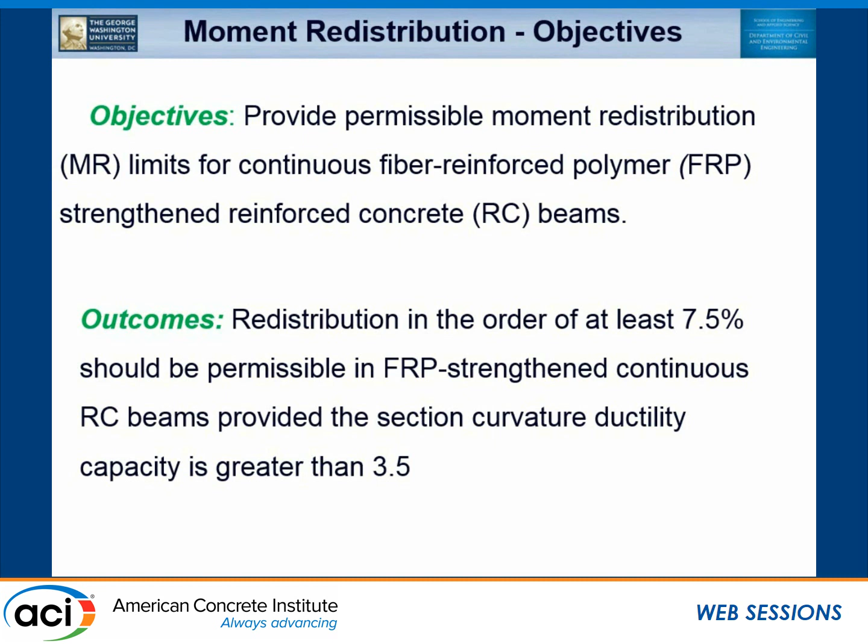Until recently, moment redistribution limits were not included or considered in retrofit applications, and the reason is because of these issues.

The behavior of FRP is somewhat brittle, but if the FRP is well anchored, the FRP rupture strain is about 1%, significantly above the yielding strain of steel. So you are going to have some redistribution. I think it's possible, and we should include redistribution, even if it's a small amount.

The other question is, was redistribution used in the original design? If the section was originally designed with moment redistribution, what is the impact on the retrofit? If we consider redistribution from a strengthened region to a non-strengthened region, we should be able to consider moment redistribution, or vice versa.

Or you have redistribution from a strengthened section into another strengthened section. So the research addressed all of these issues.

But we cannot forget that according to ACI 440, there are limitations on how much strength you can actually add to the FRP on a section. But what I want to highlight is the impact of not considering moment redistribution. There are many impacts, and I think it's important to convey that before I go on with my presentation.

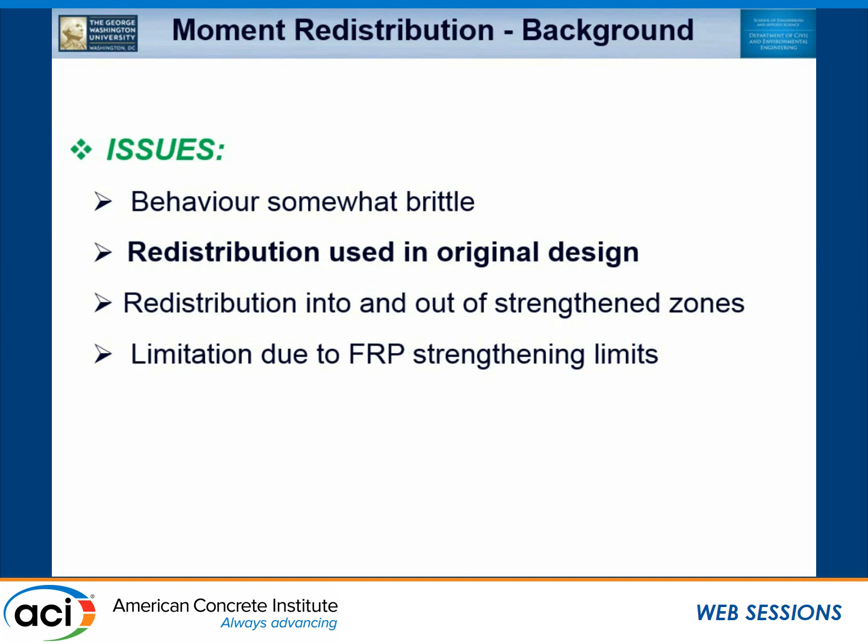Now let's imagine the code does not allow moment redistribution, and let's say we want to increase the load capacity by 10%.

Your FRP would actually have to be very high. So the question is, what if we allowed redistribution of somewhat 7.5%? Now your increase is not 36%, it's 30%, and this might be within the strengthening limits.

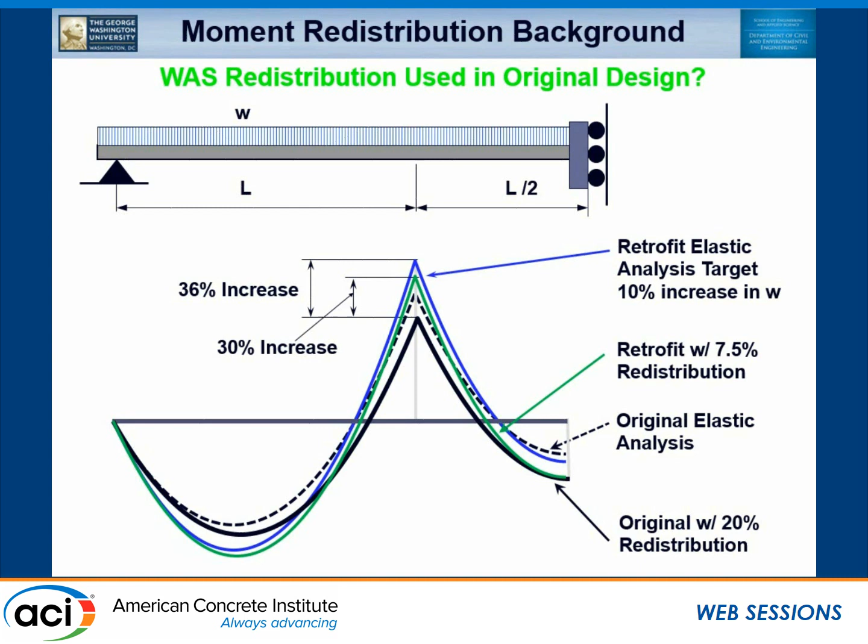So in order for us to develop reliable, permissible moment redistribution limits, very similar to what we use in ACI 318, our proposal is to do some experimental testing and advanced nonlinear finite element analysis, and see what we can propose. Here's the presentation overview.

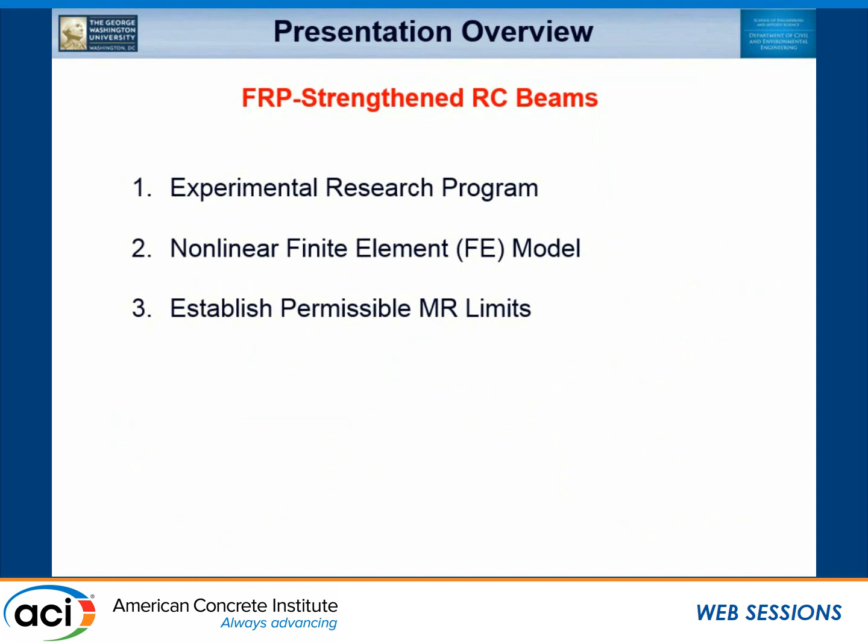I'll show the overview of the experimental research program. We tested many beams, but I'll only show 3. Then the nonlinear finite element analysis, and I'll use these results to establish permissible moment redistribution limits.

This was the experimental setup. You can see we had a 2-span beam, and we anchored the FRP with U-wraps, which was quite intense wrapping.

The reason for that is, in some of the tests, it doesn't matter if we consider moment redistribution on the section or not, the section will redistribute the moments anyway. And we had shear failure on those beams that had low U-wraps.

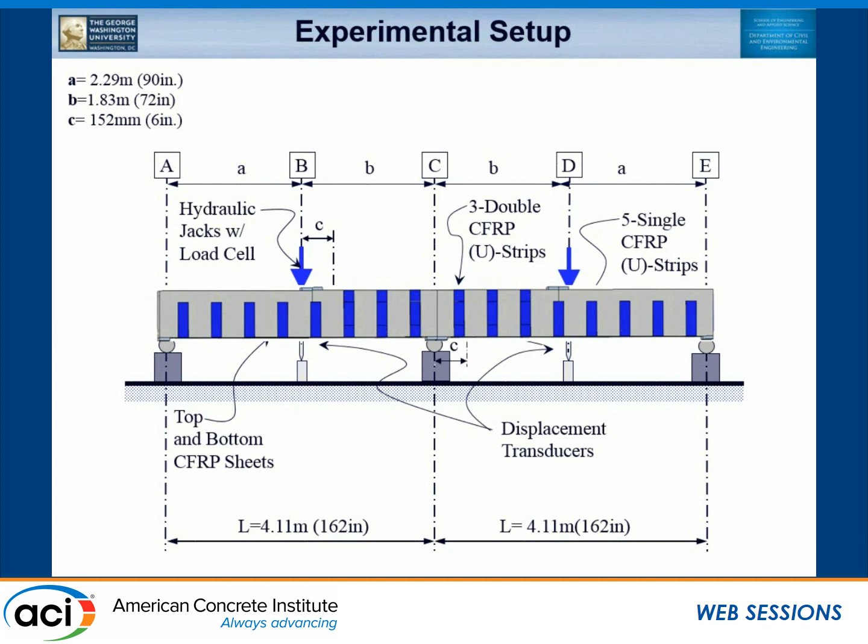Very similarly, we used a finite element model that tried to replicate our experimental setup as much as possible. I'm only going to show you 3.

One was the control unit. One used a 6-inch wide strip at the top and bottom, which I consider as low FRP.

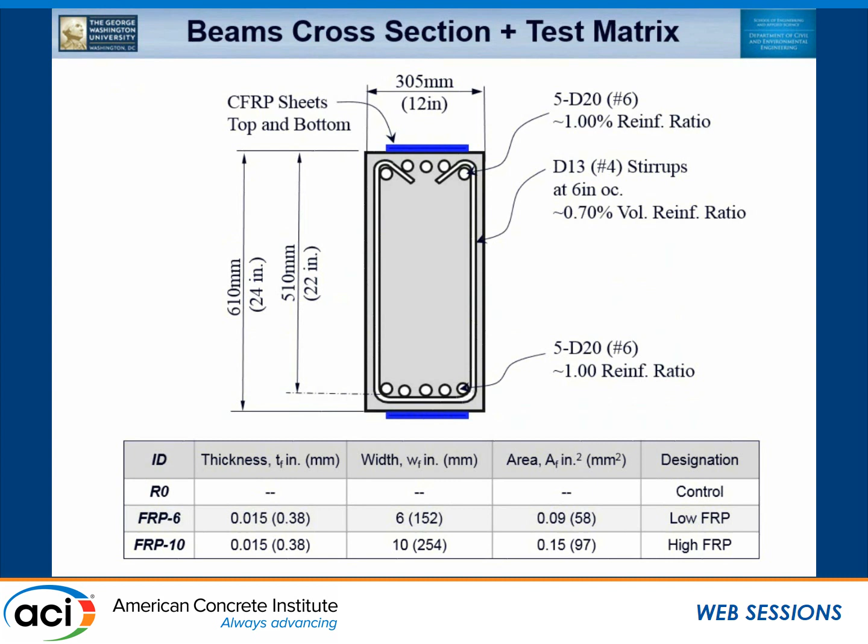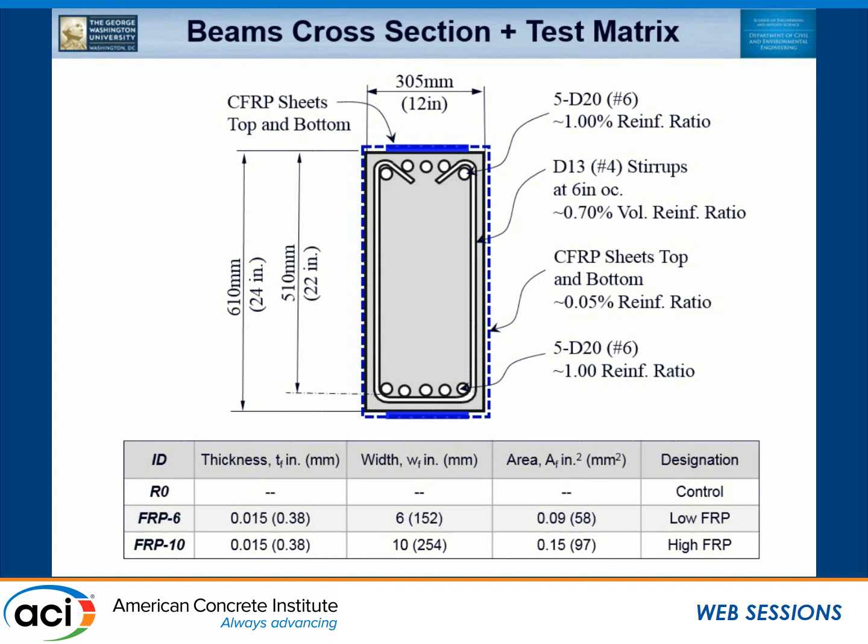For identification, I will say FRP-6, meaning the 6 inches wide FRP, and then FRP-10 for 10 inches, which I call high FRP, within this context. And then the U-wrap: in sections where we only had bottom FRP, we only used U-wraps. For sections with bottom and top FRP, we used a continuous wrap to make sure we anchor top and bottom.

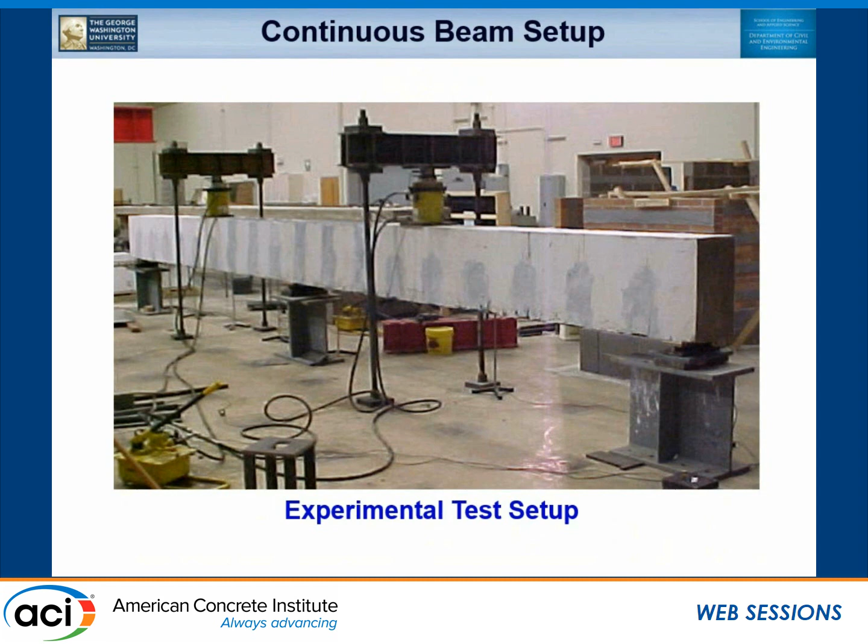So this is finally showing you the experimental setup right before testing. And this was the Abaqus finite element model. I will talk more about the supports, because it was quite critical to model that accurately. Otherwise, artificial confining of the concrete in those areas was actually quite critical for the experimental results.

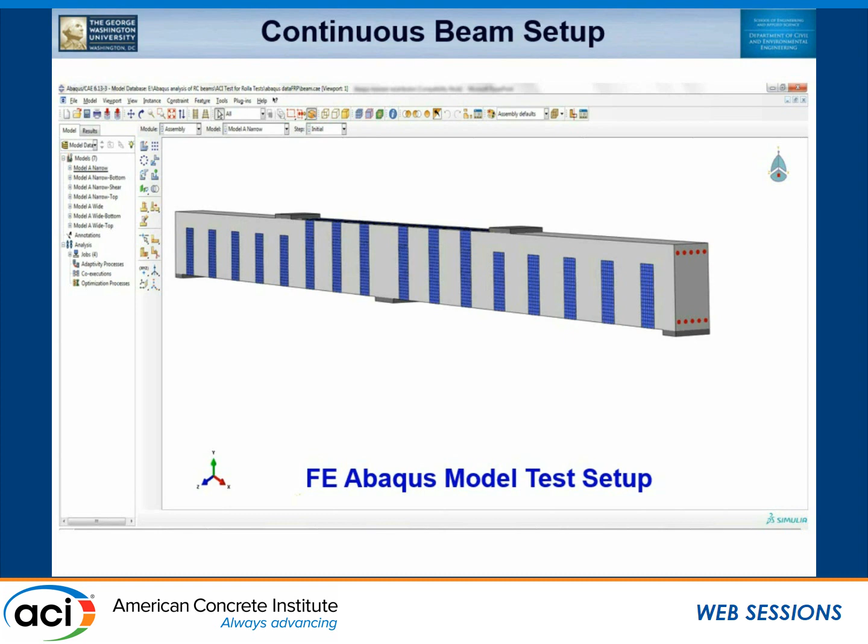So this is the Abaqus finite element model. I'm only going to highlight a few things. One is the supports. We used the 8-noded brick element, and a hyperelastic material simulation, which is what you'd use for rubber. This was a low compressible rubber, and we were actually able to reduce a lot of that artificial confinement of the concrete in those areas.

We had a host reinforced concrete beam, and we embedded the reinforcement bars. The reinforcing bars you see here were modeled with truss elements given by this stress-strain relationship. And the concrete beam used the 8-noded brick element with concrete damage plasticity. I'll talk in the next slide more about these properties and how we derived them.

You can see here the dilation angle is 26, and the viscosity parameter was not 0. I don't think in some cases it has to be 0, and it changed the duration, the simulation time, drastically, but we didn't compromise the experimental results. This was then the CDP in compression, and the tension stiffening component of our modeling.

And as you can see here is the embedded fibers for the steel.

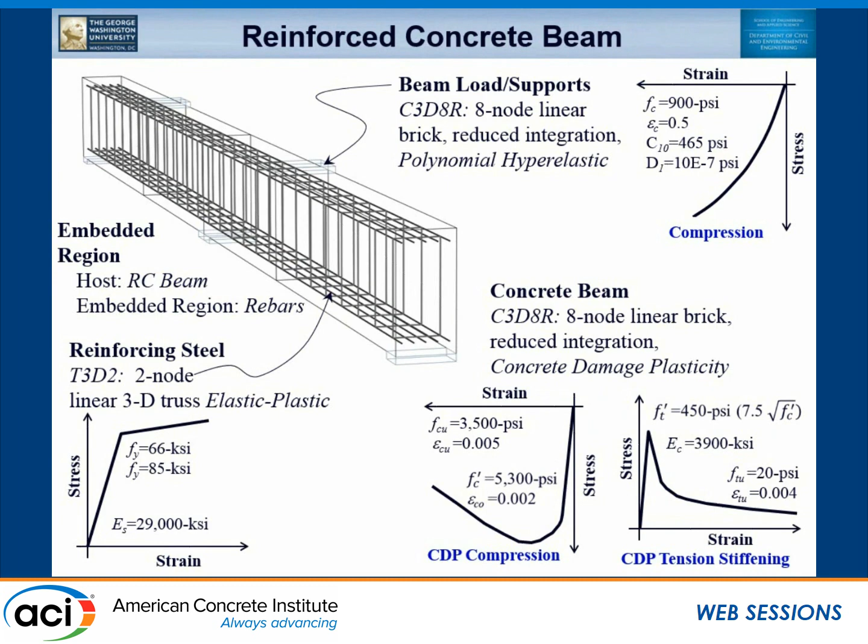So this is how we derive the material properties. We started with average test results from coupon tests, put that into our finite element model, and did 100 simulations, comparing results and changing material properties through repeated simulation. We got this type of curve — you don't see it here, but that's compared against the experimental results — and we used the properties that fit best.

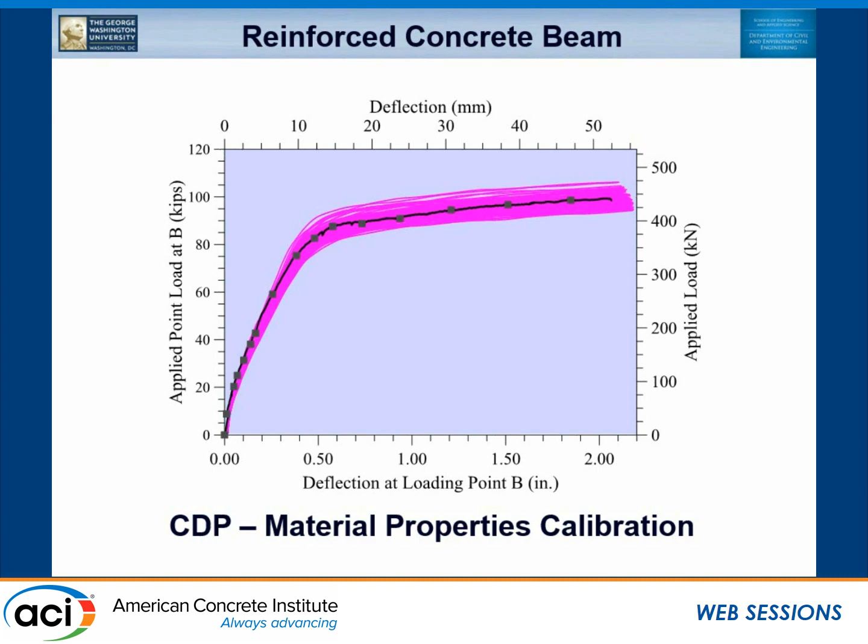You might say, well, you're getting very good results because you're doing all this work, but our goal was not necessarily to get exact experimental results. It was also to be able to use this model with a certain level of confidence to develop our permissible moment redistribution limits.

So now I'll talk about the FRP. Once again, we had top and bottom, and these are the FRP sheets. With a 4-noded shell element, we used the Hashin damage parameters.

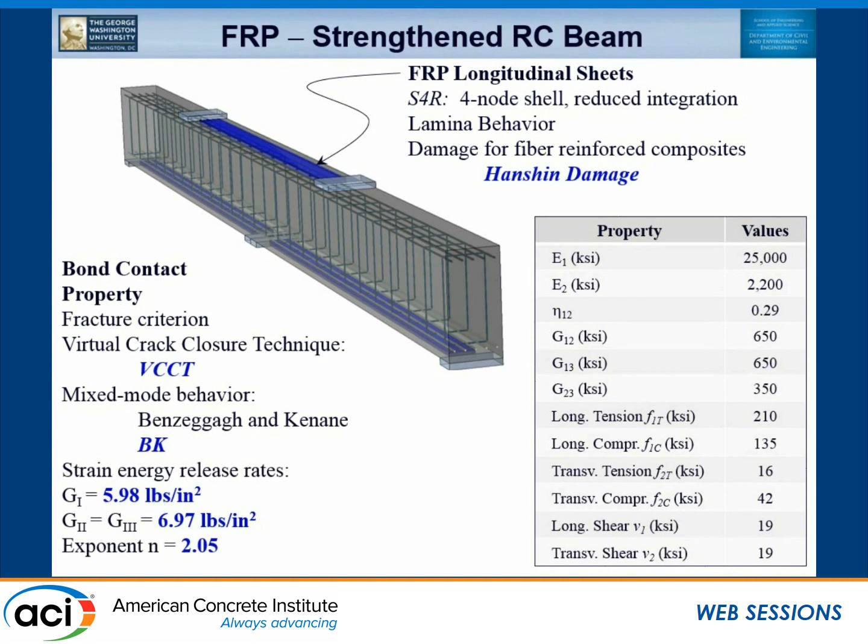For the contact, we used the virtual crack closure technique with the fracture criterion, mixed mode behavior, and some of those strain energies. Going back to the original presentations, they might not control that one, but the model requires that you enter those parameters, and the exponent was 2.05. We got very good results, and this was all the material properties we had to include.

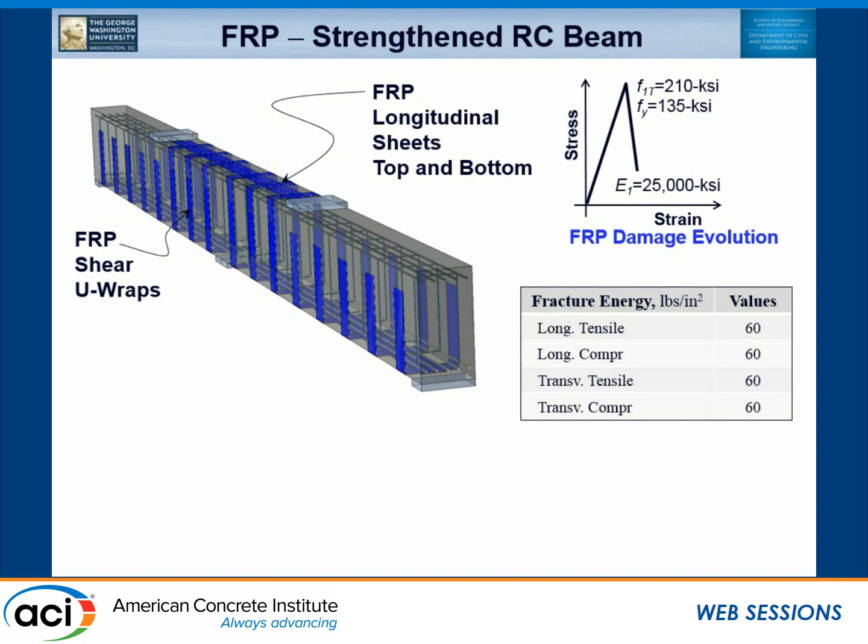For the FRP, we used a fracture energy for the FRP damage evolution, so it's not a perfectly straight line after FRP fracture. Otherwise, you cannot duplicate or at least establish the post-failure behavior of the FRP — Abaqus just does not converge. So by using FRP damage evolution, you do get post-fracture results. That's something we observed.

We need to be very careful of the mesh density, because we are using the concrete as our master surface with one mesh density. But what we found was that the mesh density for FRP was quite critical, because the program uses a master surface to node interaction, and if the mesh density on the FRP is not small enough you get high stress concentrations. So we needed to reduce those high stress intensities.

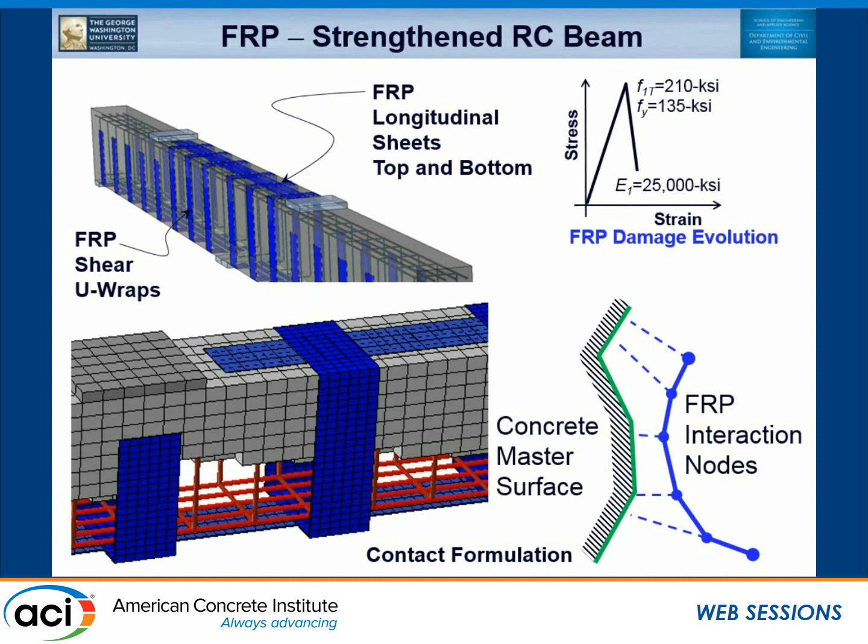And I think for the most part, the results were quite good. As you can see, the beam, by the way, didn't have holes — we just removed some of those elements so you could see the internal reinforcement.

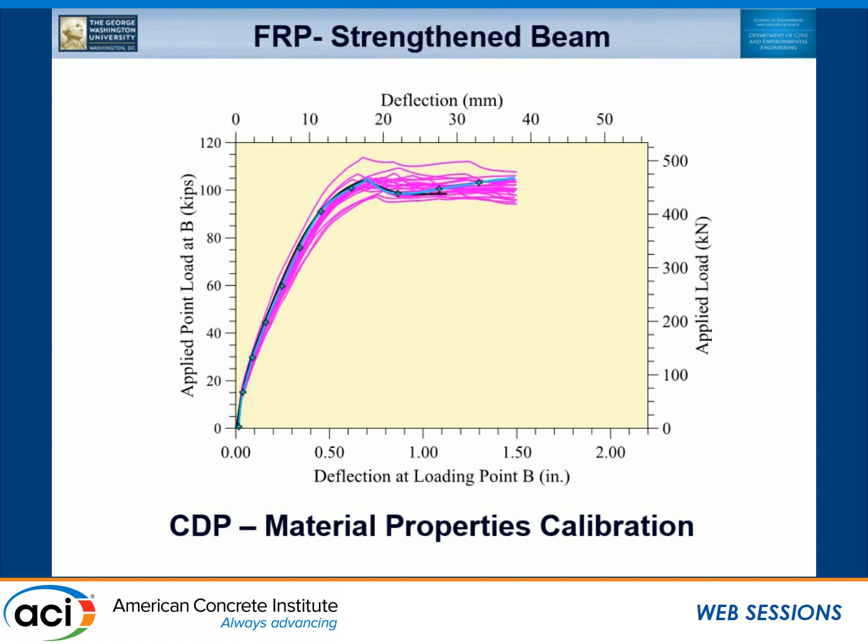Once again, this is how we derive the material properties. We start with some simulations — in this case, I'm showing 100 simulations — and then we pick the best simulation. You see the black one matches very well, I think, with the experimental results. So this is how we derive the material properties. One of the nice things about this program is... well, I used Abaqus.

If I tell you I had undergraduate students working on this project, you would say it's impossible. So I had a PhD student, and it was very nice - we used a graphical user interface. That means the undergraduate student is only inputting material properties, changing the beam. In my senior design class, the undergraduate students were able to get quite reasonable results, and they ended up going into the program and learning about Abaqus. What surprised me was they would come back at the end of the day and ask why are you doing this and this - they didn't want to just blindly use the program. I thought undergraduate students would just do the thing without wanting to know, so I was quite surprised at that exercise. That's why I'm showing you here.

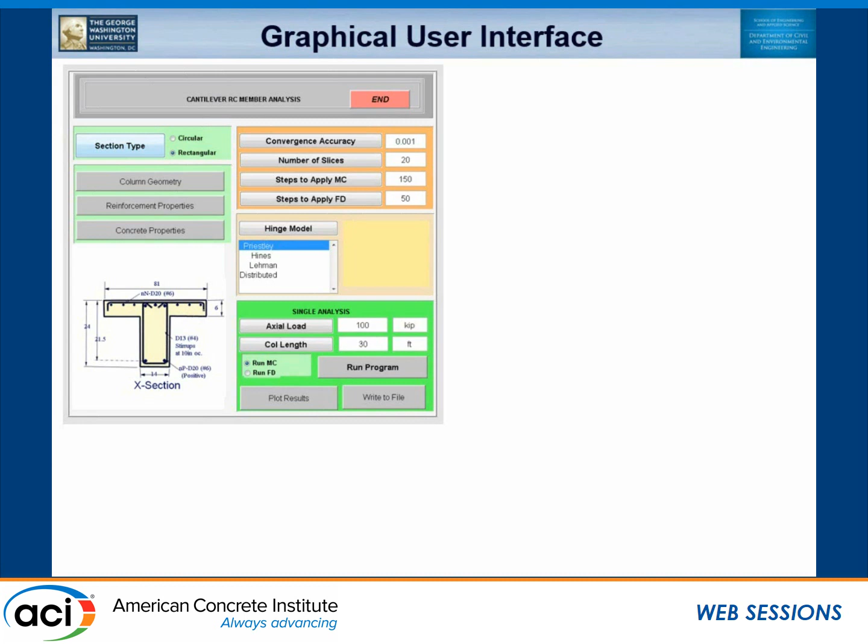The program has the MATLAB code, and the MATLAB code has script files. There's Python used for Abaqus input, and we had Python for Abaqus output. So all these results come in, and we never go into Abaqus's CAE graphical interface - this was all done via MATLAB, and we wrote all these lines using MATLAB. I think this proved to be quite a rewarding experience, seeing undergraduate students being involved and helping me derive all those curves I showed you for material properties. That was nice to see.

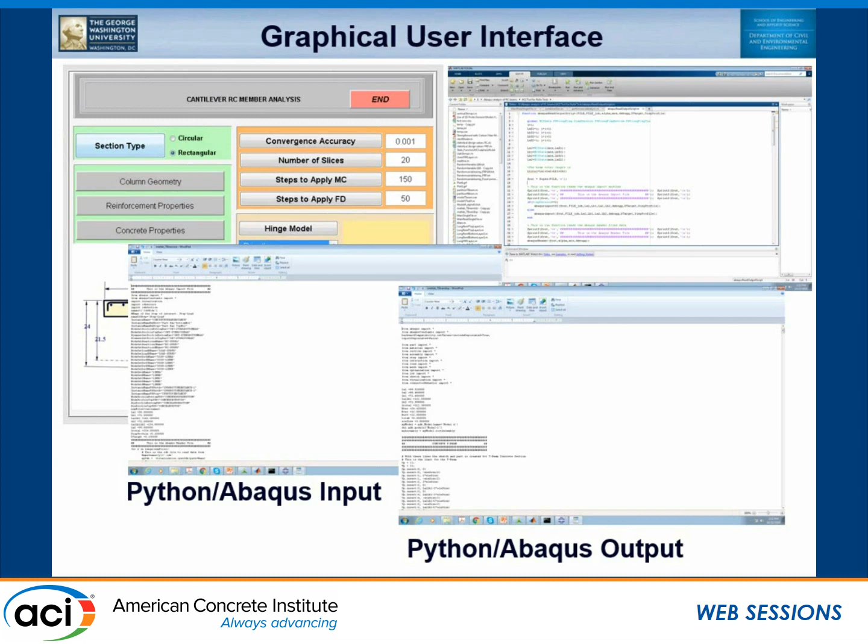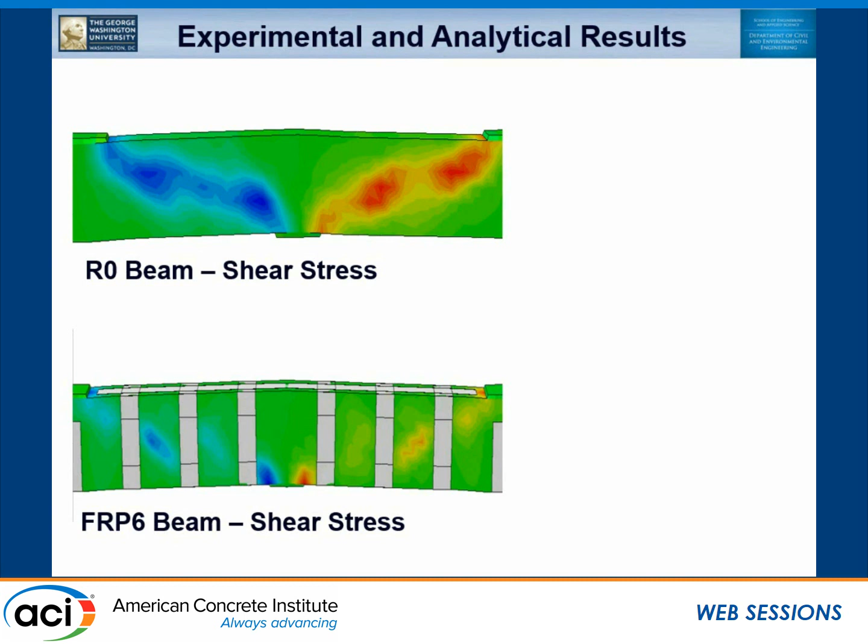Here are some of the stresses for the RC beam and the FRP. This is at the same displacement level, when we had the first fracture of the FRP, so you can see the beam without FRP and with the U-wraps. As you can see, the shear stresses are very high, which would lead to failure of the beam - I'll show you the pictures next. This is when we have the U-wraps, and as you can see, we have a significant reduction. It proves that the U-wraps did contribute to the performance of the beam.

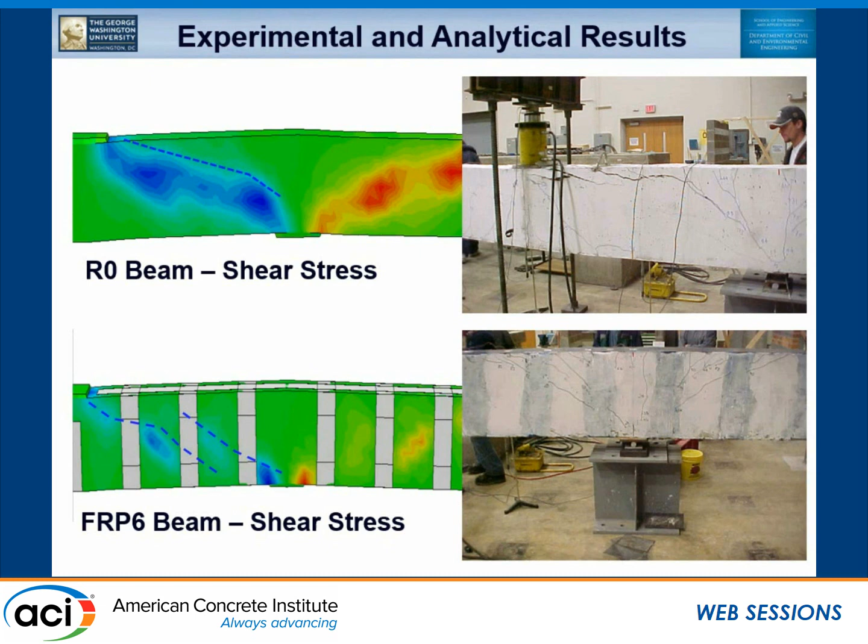This is given by the slope, so you can compare - here we had basically a failure, with some concrete spalling and crushing at the jacks, and then the beam just had a shear failure starting from the top. For the U-wraps, you see there was no failure of the section - the cracks remain pretty closed, so we feel comfortable with what we are doing here.

Let me show you now some strain profiles. In order to develop some of our relations, we looked into plotting moment redistribution limits, not just in terms of steel strain, but also in terms of curvature ductility. To get to this representation, we need the plastic hinge length - since we have the strain profiles, let's look at different models for plastic hinge length and see if we can compare this, so we can use this equation to plot moment redistribution versus curvature ductility. This expression was developed in an earlier work.

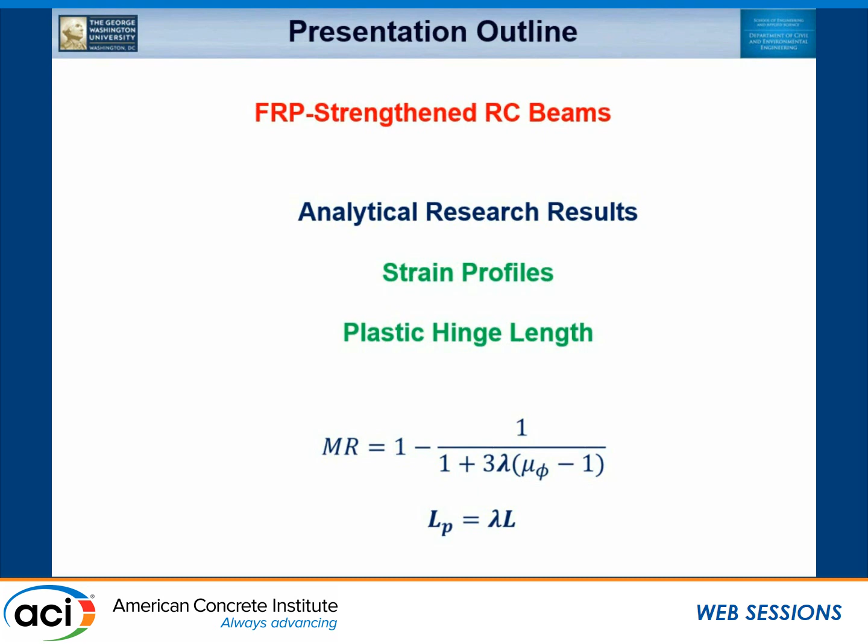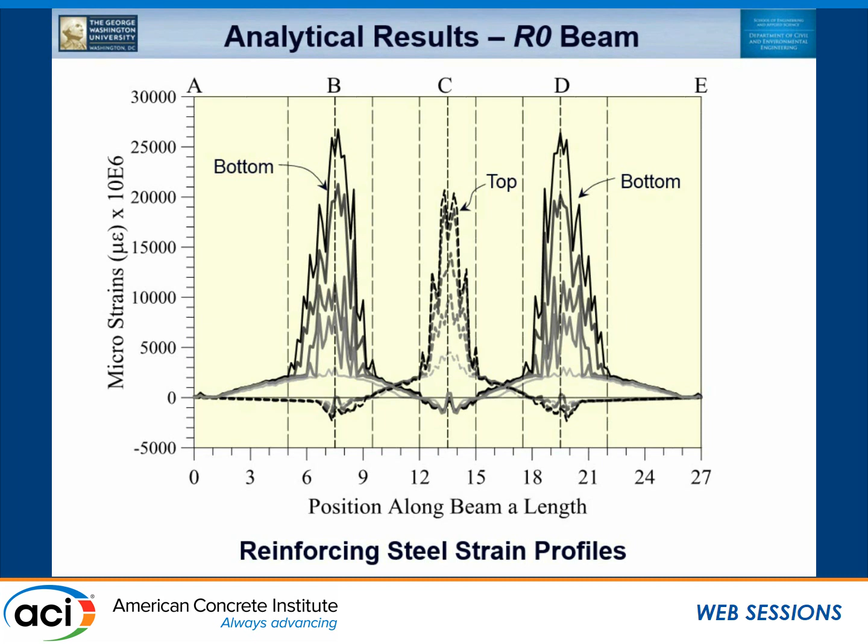These are the strain profiles for the RC beam, the control beam. As you can see, the yielding of the steel is represented by the curve - this is where the load is. The distance between these points is not the same as between those points because of your shear span ratio. The shear span ratio is here, and it's not from here to there, but from here to about that point. So you can see this is going to have an impact on the plastic hinge length for these structures.

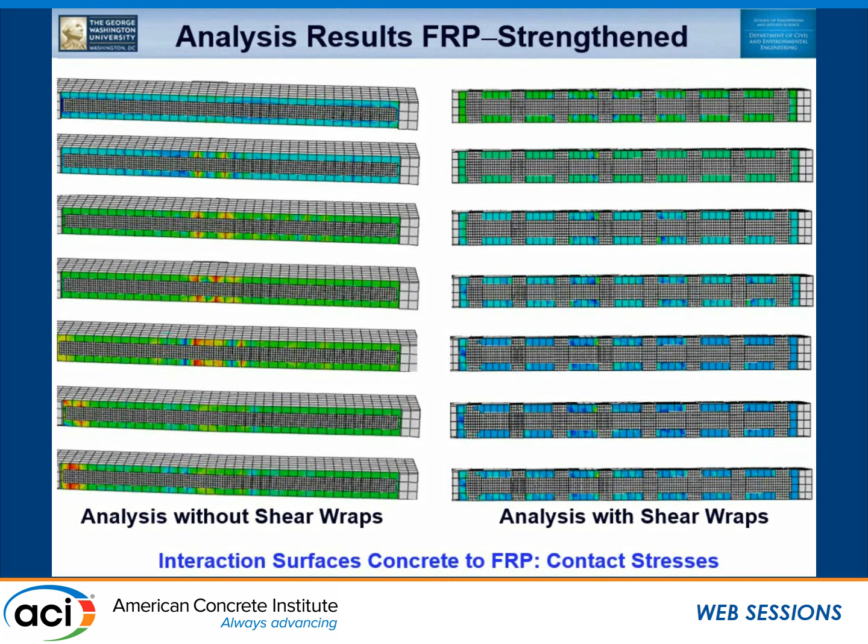And then you see when we put U-wraps, very nice, very low contact stresses, except in some areas there, I don't know if you can see, but we had some contact stresses there. But we didn't have any peeling or debonding of the FRP. It was a sound and very good procedure until, of course, we had fracture of the FRP.

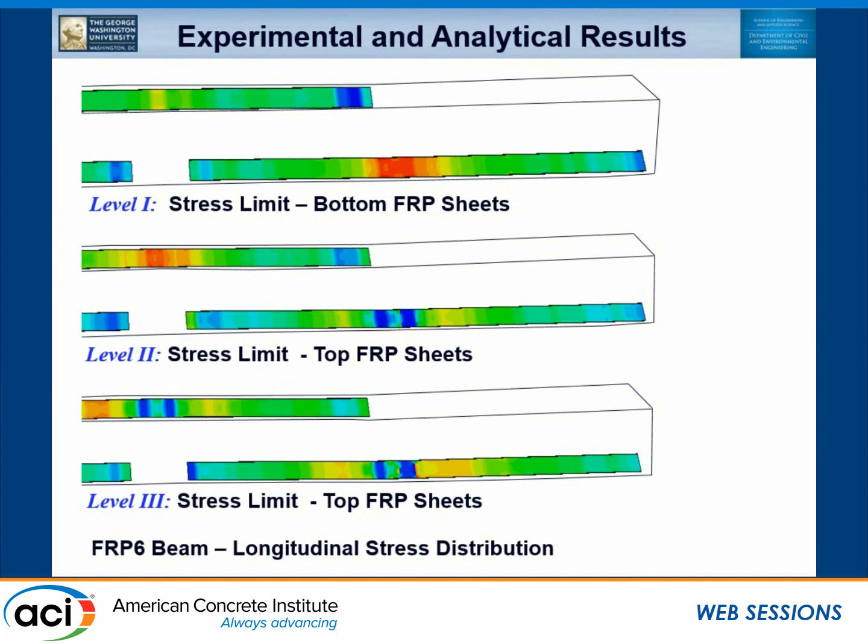So these are some stresses at level 1, where we had fracture of the FRP. Then at level 2, the FRP has already fractured, we start having fracture at the top, and basically the FRP is no longer doing anything. That's why the beam with FRP past this level just went back to the curve with the control unit, and that makes sense. This is then the failure on the bottom there for the FRP.

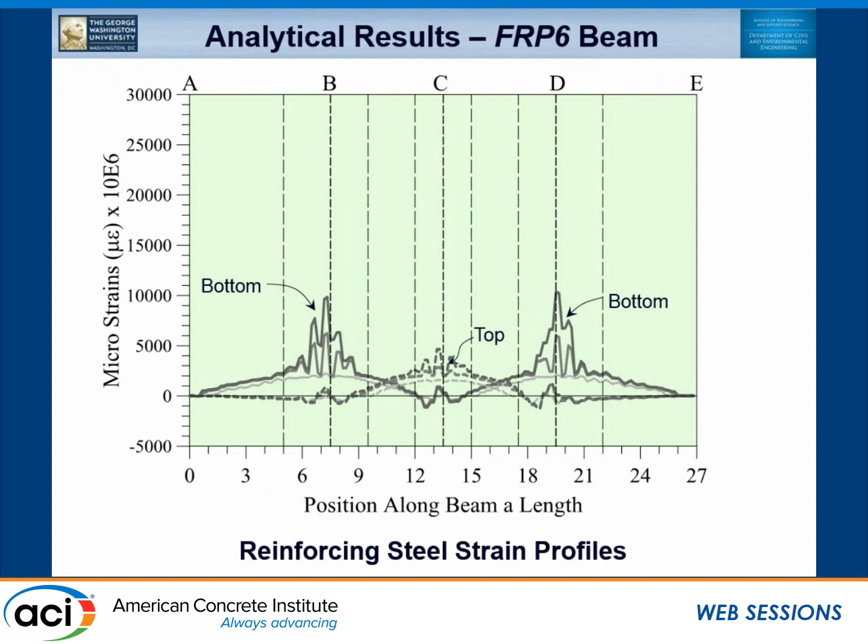I wish I had done this analysis before, because I would like to see the reverse, but sometimes you need experimental results to calibrate. By the time you run out of funds, you cannot redo more tests. Hopefully I'll get to do that in the second round of tests.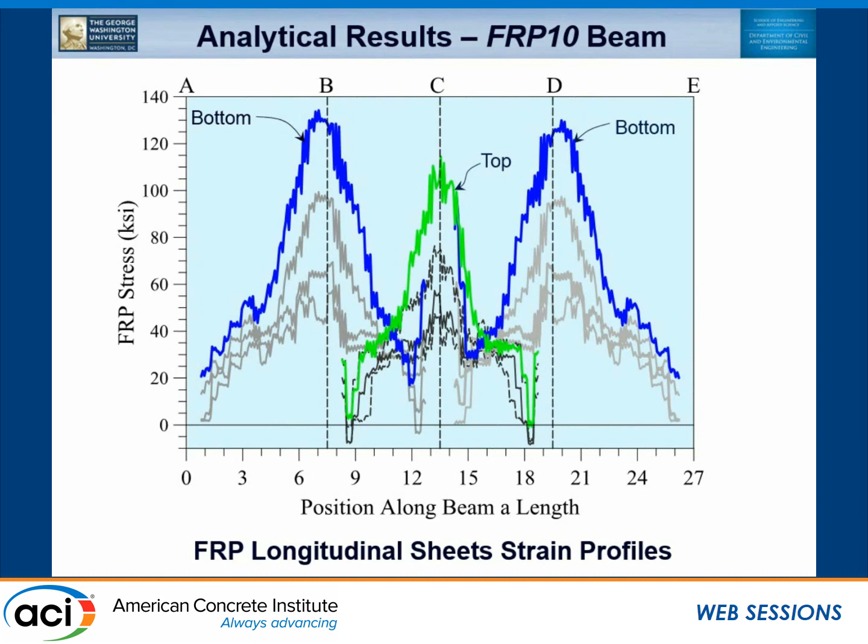And this is for the high FRP, and once again we got the same results, although the differences between that point and that point for the high FRP is not as high.

So different plastic hinge length models have been proposed since 1956 until 1992 by Paulay, Priestley, and Park. Remember that these recently were done for axially loaded concrete members, columns, whereas these were for beams.

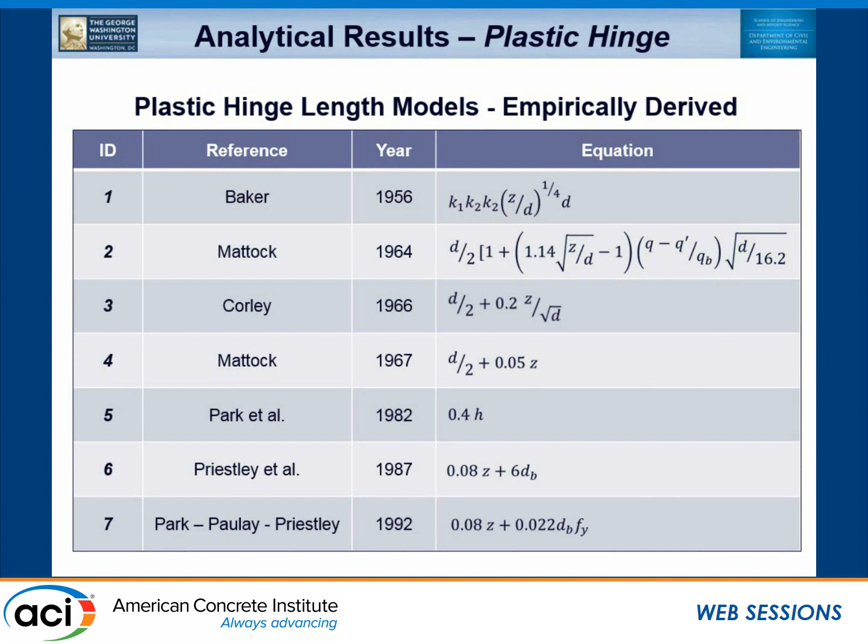So let's compare those results, based on all analytical work. Condensing all the results and plotting some averages, you can see the Baker, 1 means is good, so Baker did very well. So did the Mattock. But look at those columns, plastic hinge length models didn't do very well.

So I think this shows that we need to be very careful using these models for the plastic hinge length. Now we wanted to have very good confidence that the plastic hinge model we are using is reliable, so we can plot moment redistribution limits versus curvature ductility.

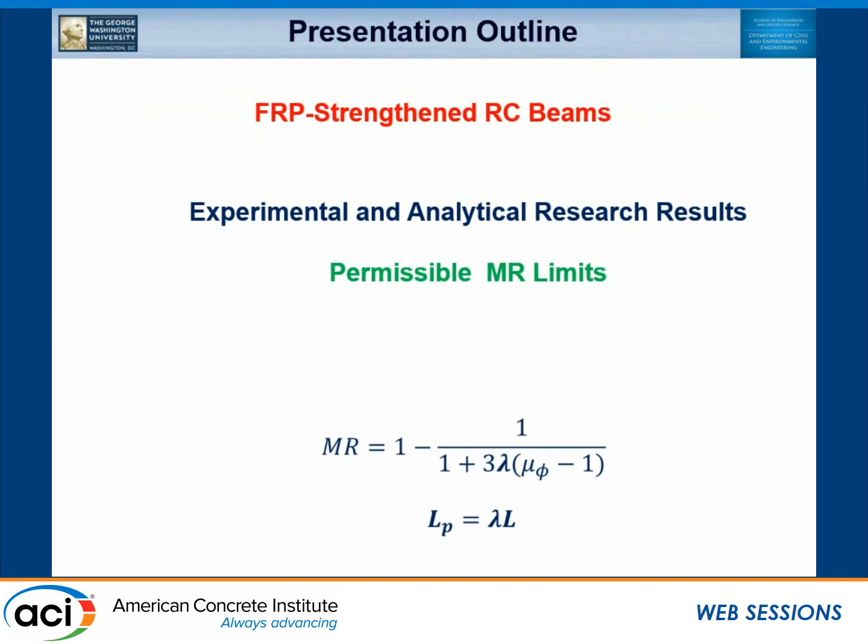Very quickly, some moment redistribution limits. Using this equation from a previous study, the moment redistribution experimentally for the control beam was 17, but take a look at the FRP retrofitted, it was not 0. So we have very high redistribution limits. Even if we do not consider redistribution in design, we will have redistribution in the FRP retrofitted structure.

So it's very critical that we understand and ask the question: what does this mean in terms of performance? Will it affect the shear design of the beams? Because you have a shift in the bending moment diagram, and as we know, that increases the shear, which is quite significant. I'm not going to show that results here.

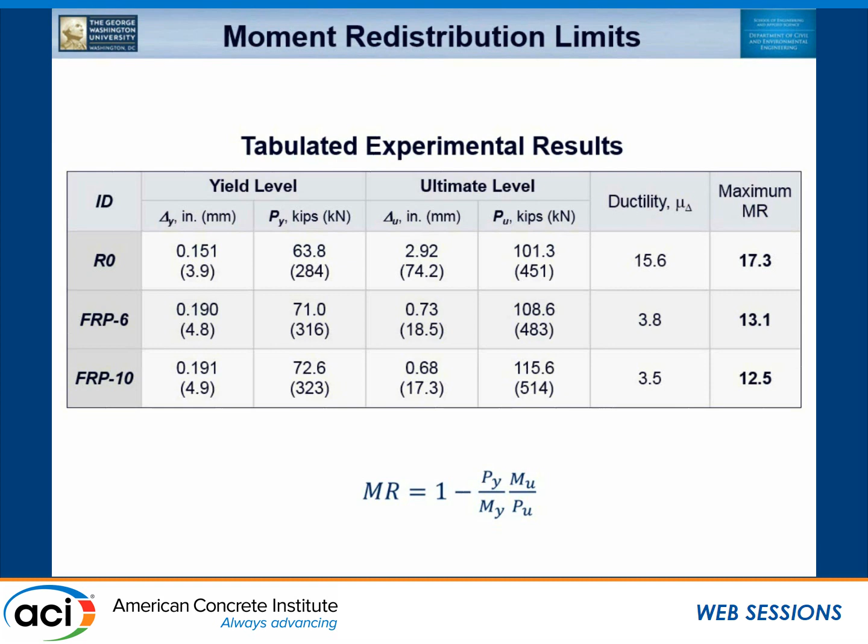These are the ACI permissible limits for regular reinforced concrete. So for top and bottom FRP, we use very different ratios. This is basically when we have no FRP, only at the bottom, and then we vary the reinforcement, you see all those points, but take a look, you cannot see anything.

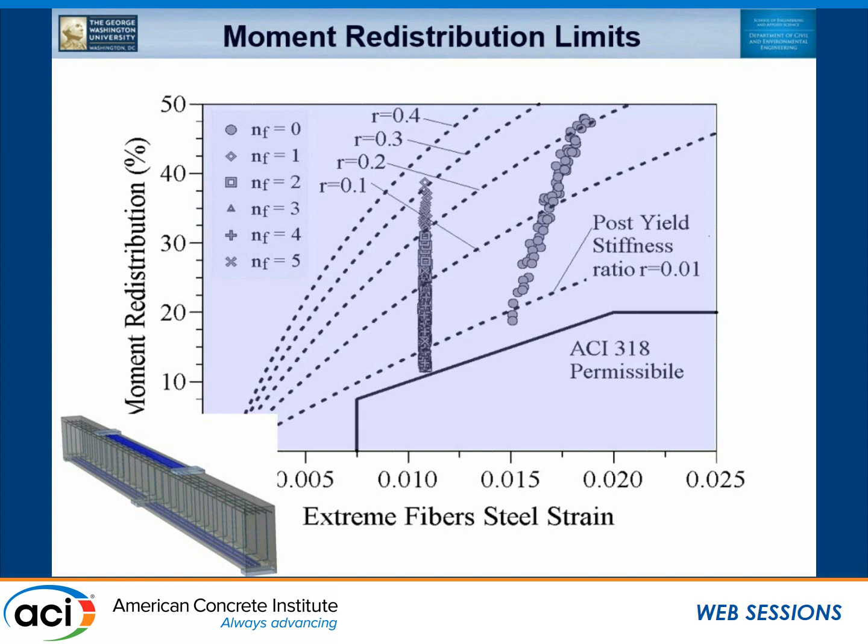The steel strain is controlled by the FRP, and the FRP is 0.01, which is here, but we have higher steel strains when we have more, so we cannot really plot this versus steel strains. It's a little bit better, and we tend to separate our results when we use this in terms of curvature ductility.

So we have one limit that we can clearly observe for about 3, the moment redistribution limit could be somewhere around this level. These curves were basically average results from all of the simulations we did, from which we plotted these redistribution limits. And for these regions, we could say maybe something higher.

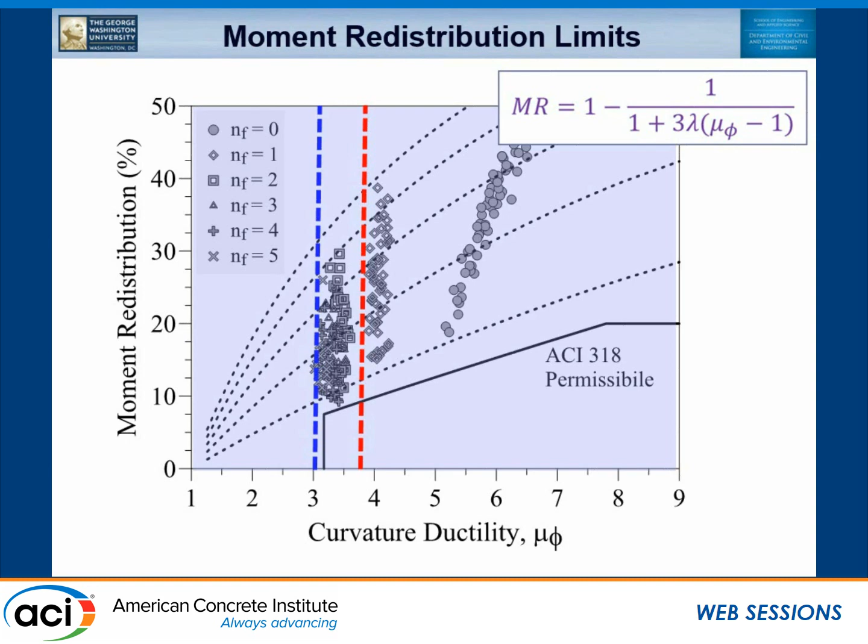And that's the analysis that we used to be able to provide some permissible moment redistribution limits.

Another thing we need to consider, and I won't show in detail but want to alert you to, is the strengthening limits given by that expression from ACI 440. There are some sections where the section does not meet that criteria limit, so we cannot retrofit for those levels. But look how many configurations of retrofit actually met the criteria. I would say for most sections we should be considering moment redistribution limits.

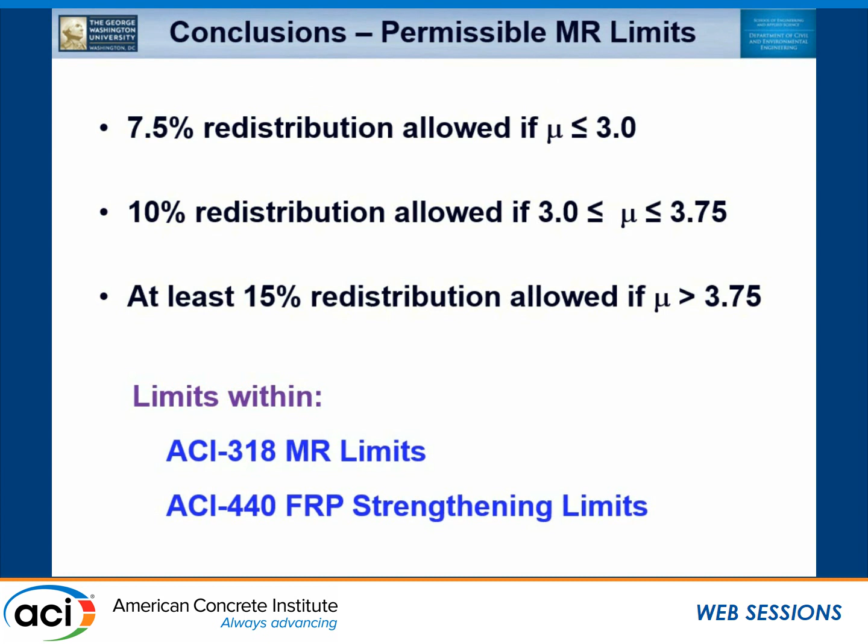So these are some conclusions from our work. For ductility, curvature ductility of 3, considering 7.5 seems reasonable, and for higher levels, these are some other values. Limits certainly in terms of ACI 318 redistribution limits and the strengthening limits by ACI 440.

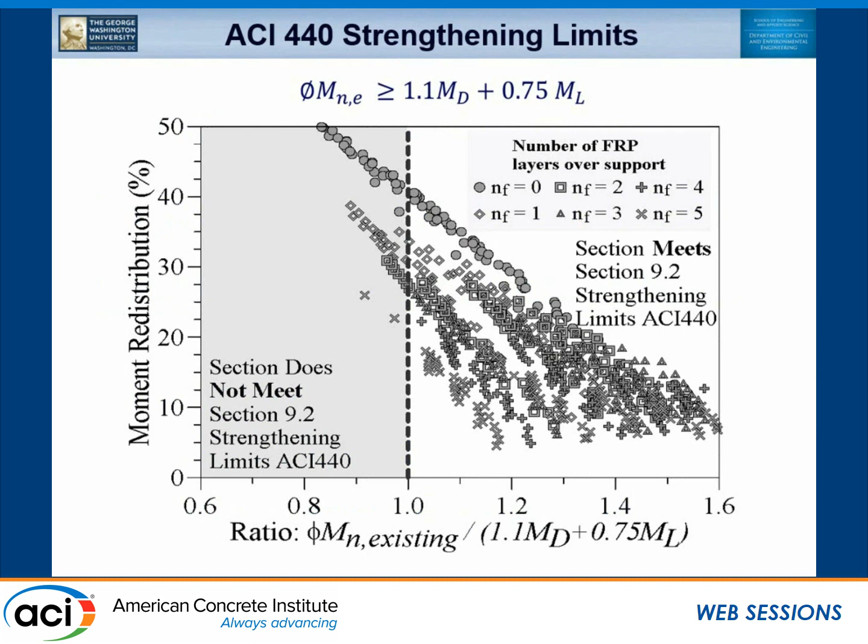So the moment redistribution is 1 minus the moment redistribution at, so it's a function of your moment at the limit versus the yield moment. If you work it out, we have this expression developed in an earlier paper. If you expand the expression, that's how we got to this relation. Yes, it's a very long derivation, but using those results, that's how we derived it. I can show you the derivation afterwards.

Yes, we can take one more question. Pedro, a lot of great data here.

It's wonderful to see that. I noticed that in the beams you tested, you did use a lot of U-wrap anchors. I kind of lost the train of thought about whether you had any conclusions about if you had a beam with longitudinal FRP and no U-wrap anchors, what would be the moment redistribution for that beam versus one you tested with significant U-wrap anchors, where you were able to reach the tensile strength of the longitudinal FRP? The debonding occurs within the elastic region, so way before that point.